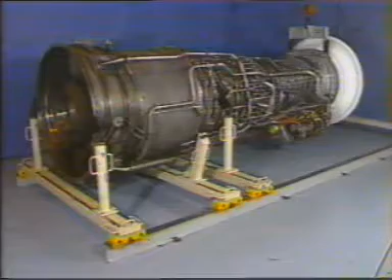This program is one of a series which accompanies the General Electric LM2500 work packages. This presentation contains the instructions for the replacement of the spark igniters and is designed as a supplement to the printed work package in the maintenance manual.

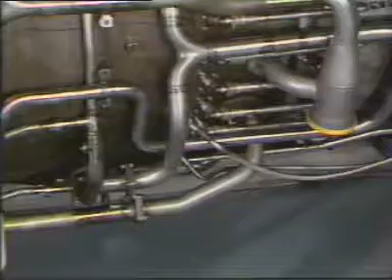There are two spark igniters on the LM2500 gas turbine. Aft looking forward, both are located on the lower right side of the compressor rear frame at the 4 o'clock and 5 o'clock positions. The replacement procedure is the same for each. In this demonstration, the igniter at the 4 o'clock position will be removed.

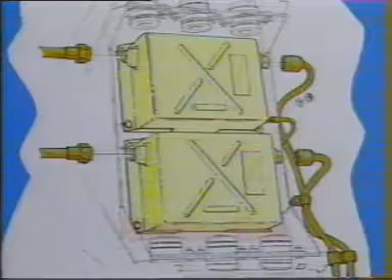Before beginning the removal procedure, it is vital that the ignition system cannot be energized. The output voltage of 15,000 to 20,000 volts from the ignition exciter is dangerous and can be lethal. Therefore, go to the exciter box and first disconnect the 115-volt AC input leads, and then the output ignition leads.

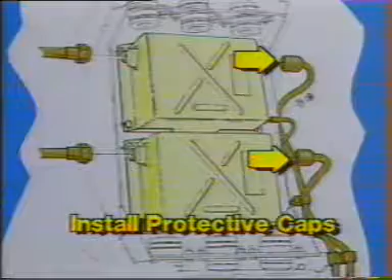Do not touch the center contact of the exciter output terminal, and make sure that the electrical jumper is in place on the exciter mounting bracket. Install the non-conductive protective caps over the input and the output terminals of the exciter box, and also over the 115-volt AC input lead connectors. Now the spark igniter can be replaced safely.

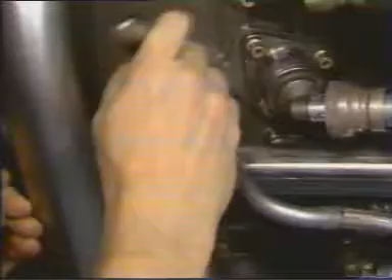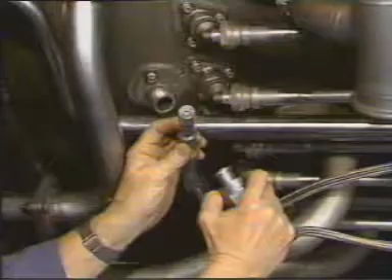After removing the safety wire, take a 1 1/4 inch open-end wrench and loosen the igniter lead nut. Be careful not to drop the spark igniter, because only the ignition lead coupling nut holds the spark igniter into the compressor rear frame. Gently withdraw the spark igniter with its gaskets from the combustor igniter hole and pull it out of the ignition lead socket. The removal of the spark igniter is complete.

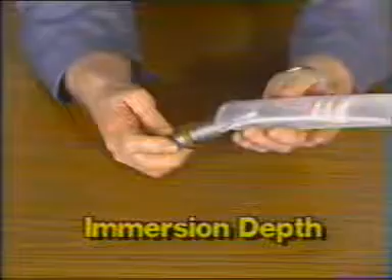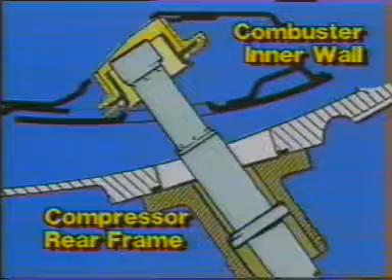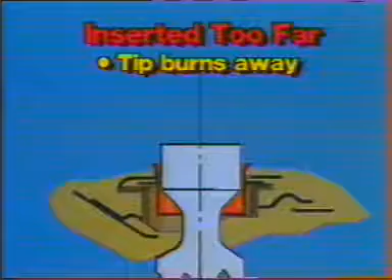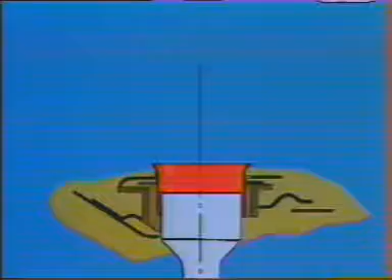Whenever a new spark igniter is installed, the immersion depth must be determined. This is the depth at which the igniter will be placed into the combustor ignition hole, so that the tip of the spark igniter will protrude the appropriate distance into the combustor gas stream. If the igniter is installed too far in, the tip will burn away or its life expectancy will be shortened. If the tip is not in far enough, it will fail to ignite the fuel mixture during a start. Therefore, it is important that the proper immersion depth be determined.

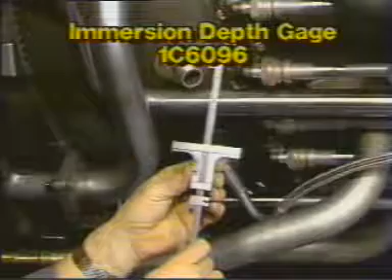To demonstrate this procedure, the immersion depth gauge 1C6096 and a cutaway drawing of the combustor will be used. Insert the tool 1C6096 through the adapter hole and hook the tool onto the far inside aft edge of the combustor igniter hole. Lock the tool to this reading and remove it from the hole.

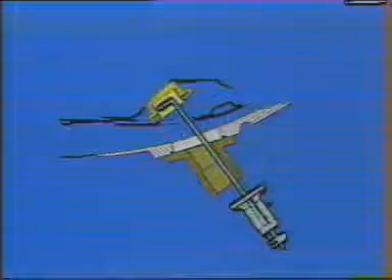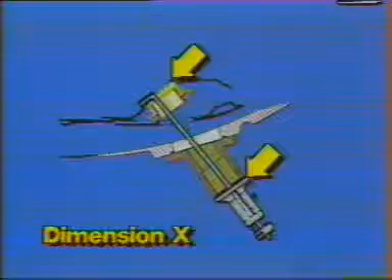This measurement is the distance from the outside flange of the adapter to the far inside aft edge of the combustor igniter hole and is expressed as dimension X. In this case, the depth gauge indicates 3.270 inches. Now take the new spark igniter and remove the gaskets from it.

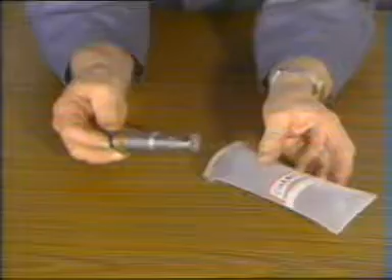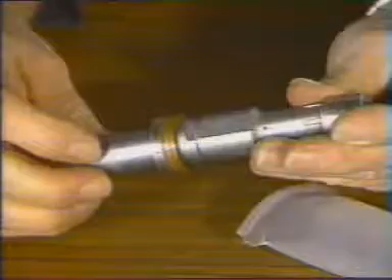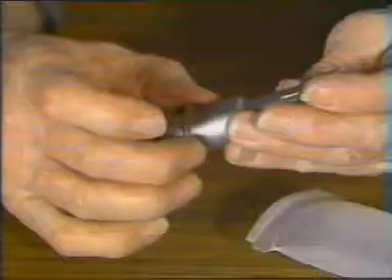Notice that these gaskets are keyed to the igniter plug to prevent them from falling off of the plug. They are keyed by two flat surfaces 180 degrees apart on the spark igniter and by the flat section located on the inner ring of the gasket. To remove or install gaskets onto the igniter, slide the gasket up to the slotted ring, rotate the gasket 180 degrees until the other flat side of the igniter matches the gasket's flat side, and slide the gasket along the next section.

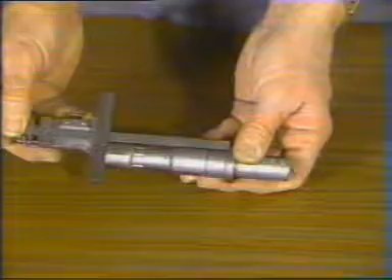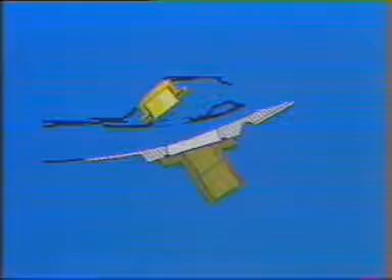After removing all of the gaskets, measure the igniter from its tip to the brazed-on gasket using a standard depth gauge. In this case, the gauge indicates 3.320 inches. Record this as dimension Y. Now there are two known quantities: dimension X, the depth of the combustor igniter hole, and dimension Y, the length of the spark igniter to be inserted into this hole. The igniter is longer than the hole is deep, so subtract dimension X from dimension Y to determine how much of the igniter is protruding beyond the edge of the hole. In this example, the resulting difference is 50 thousandths of an inch.

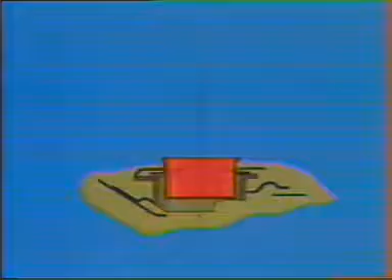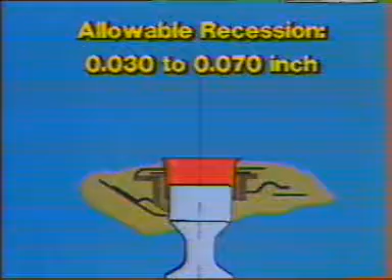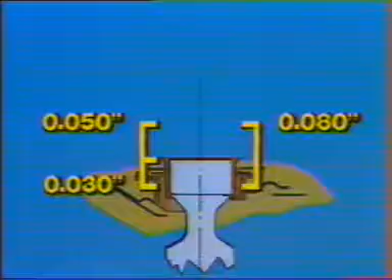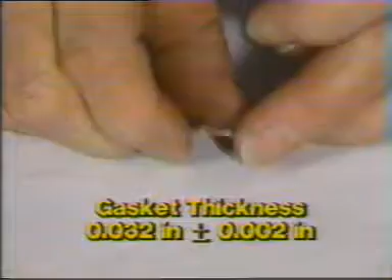The objective for the proper immersion depth is for the igniter to be recessed in this hole 30 to 70 thousandths of an inch from the inner combustor wall. When the minimum recession amount of 30 thousandths of an inch is added to the amount of current protrusion into the gas stream, 50 thousandths of an inch, the total is 80 thousandths of an inch, the distance that the igniter must move back out of the hole. This is achieved by adding gaskets to the spark igniter. Do not use more than 8 gaskets on one spark igniter. The thickness of a gasket is 32 thousandths of an inch, plus or minus 2 thousandths of an inch.

To determine the proper number of gaskets to use, divide the distance that needs to be filled, 80 thousandths of an inch, by the thickness of a gasket, 32 thousandths of an inch. The answer is 2.5 gaskets. Therefore, use 3 gaskets in this case. Install the 3 gaskets onto the spark igniter and insert the igniter into the ignition lead and the combustor hole. Then connect the ignition lead coupling nut.

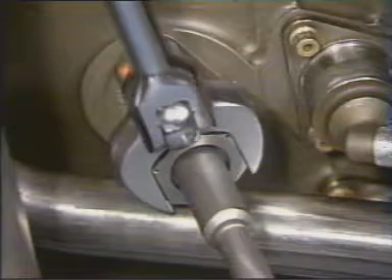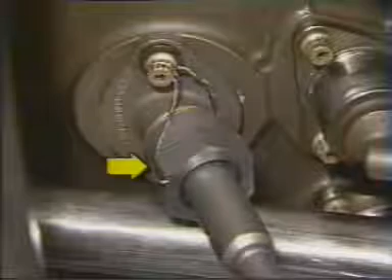Torque the nut from 23 to 27 foot-pounds. Then install safety wire, securing the coupling nut to the 2 screws on the adapter boss of the compressor rear frame. Now it is safe to reconnect the ignition exciter. Remove the protective caps and reconnect the output ignition leads to the ignition exciter first. Torque the coupling nuts to 130 to 150 inch-pounds.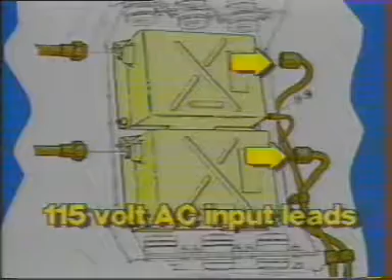Next, reattach the 115-volt AC input leads to the ignition exciter. Visually inspect the seal for breaks, nicks, tears, or other damage. If the seal is damaged, replace it with a new one. Hand tighten the couplings on the input leads and safety wire them to the box. The final step in the replacement of the spark igniter is to perform the spark igniter operation test as described in the operations section of the technical manual for the LM2500 engine.

The replacement of the spark igniter on the LM2500 gas turbine is a simple procedure requiring little time and few tools. For a review of this procedure, refer to the maintenance manual for the General Electric Marine and Industrial LM2500 gas turbine.